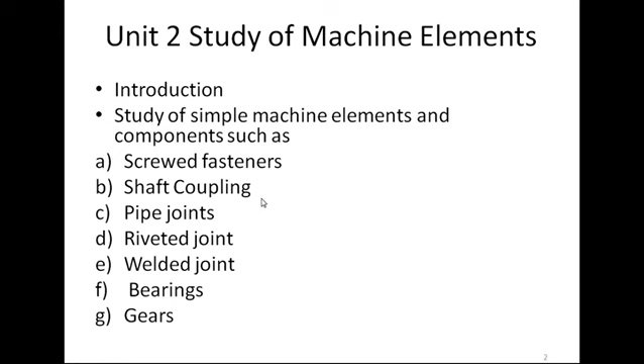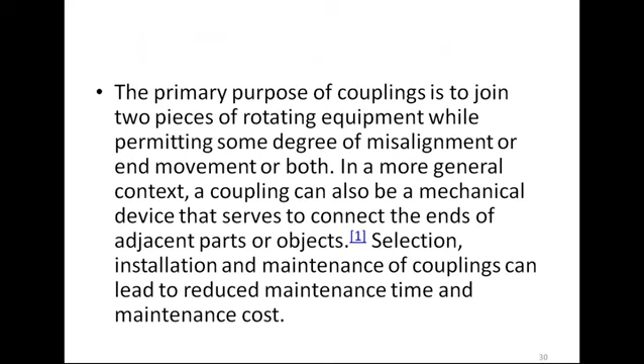In machine drawing, we have started the chapter Study of Machine Elements, and in this chapter we have seen the introduction. We have started the machine elements, we have seen screwed fasteners, we have seen the shaft coupling, and from today's lecture we are going to see the pipe joint. Okay friends, so today we are going to see the pipe joints.

So first of all, we want to see why pipe joints are required and what is meant by a pipe joint. A fitting or adapter is used in a pipe system to connect straight sections of pipe or tube, adapt to different sizes or shapes, and for other purposes such as regulating or measuring fluid flow. These fittings are used in plumbing to manipulate the conveyance of water, gas or liquid waste in domestic or commercial environments within a system of pipes or tubes.

So basically pipe joints are used when we want to transfer fluid or gas from one place to another place. We require to use tubes. Sometimes we are using material like steel or mild steel for transfer of liquids, or sometimes we are using plastic like PVC pipes for transfer of fluids. So basically pipe joints are important when we are using pipes from one place to another place.

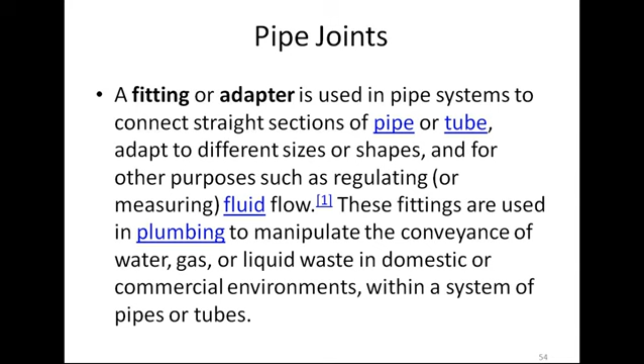So first of all we are going to learn what kind of material we are using for the pipe joint. We can use carbon and galvanized steel, impact tested carbon steel, low temperature carbon steel, and stainless steel. We can also use non-ferrous metals, including copper and Inconel.

We can also use non-metallics like acrylonitrile butadiene styrene, in short form ABS, or fiber reinforced plastic, that is FRP, or polyvinyl chloride, that is PVC, or high density polyethylene, that is HDPE. So these are the many types of materials available in industry.

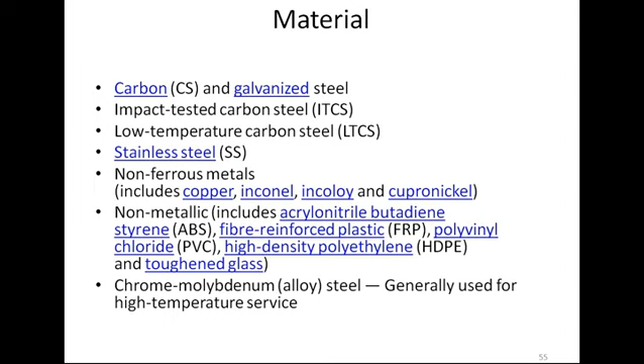As per the requirement, what kind of fluid or chemicals we are transferring, and what is the distance, how long a distance we want to transfer, and whether we require temporary pipes or permanent pipes, on the basis of this we are going to select one of the materials for the pipe joint.

So in pipe joints, the first element we are going to see is the elbow. An elbow is installed between two lengths of pipe or tubing to allow a change of direction, usually a 90 degree or 45 degree angle. The ends may be machined for butt welding, threaded or socketed. So you will see here the elbow looks like this, and here we have shown the general layout drawing of the elbow, with one diameter D1 and another diameter D2.

So when you want to connect two pipes which have a 90 degree angle between them, and whatever liquid comes from one end you want to transfer at 90 degrees, in between these two pipes we are going to attach this elbow. That's why here we have shown a 90 degree elbow.

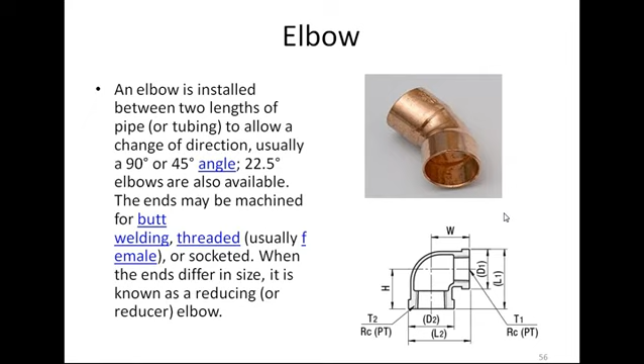So here we will see the actual application. This is one pipe and this is another pipe, and we want to transfer our liquid or water from this level to this higher level. So here we are using this elbow. We have placed one end of a pipe into one end of the elbow and the other pipe into the other end of the elbow. So we can use this elbow for proper transfer of fluid through 90 degrees.

Here one more example I have shown. This is one pipe, this is another pipe, and this is another pipe, and these three pipes are joined with elbows. In between these two pipes we have used one elbow, and in between these two pipes we have used one elbow. So like this we can connect two pipes that are at a 90 degree angle.

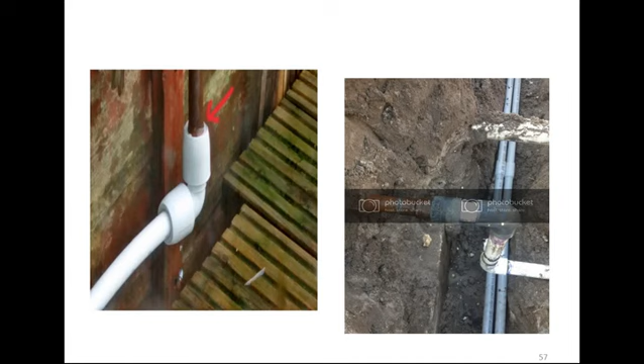The second most important pipe joint we are going to see is a coupling. A coupling connects two pipes. If their sizes differ, this fitting is known as the reducing coupling, reducer, or adapter.

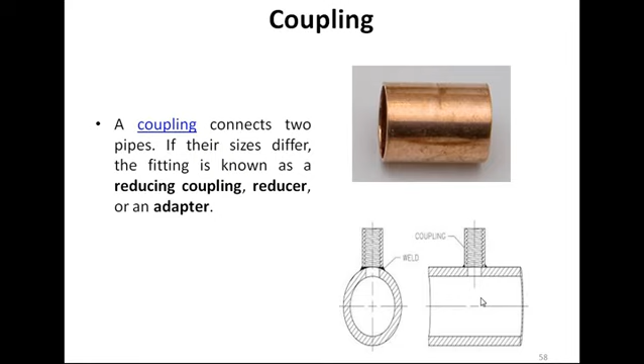This is one coupling, used when the pipes are in a straight line portion that we can connect. Here is a general layout drawing of a coupling. One pipe is inserted from this side and another pipe from this side, and here we do tightening using a bolt. By tightening this bolt, the pipes we have inserted remain close together.

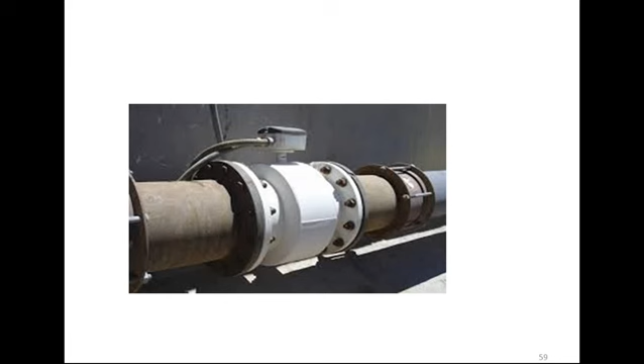Now next we are going to see a union. A union also connects two pipes. It allows future disconnection of the pipes for maintenance, and allows easy connection and disconnection multiple times if needed. It consists of three parts: a nut, a female end and a male end. When the female and male ends are joined, the nut seals the joint by pressing the two ends tightly together. Unions are a type of very compact flange connector.

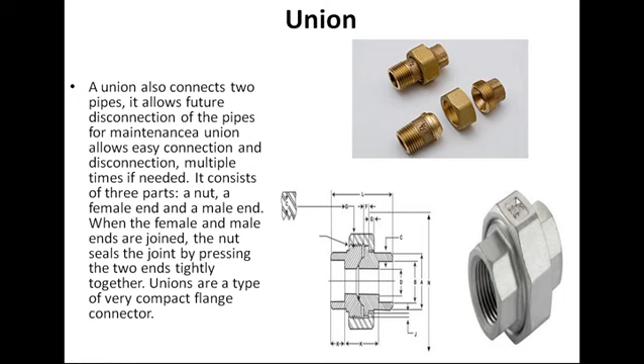This is one more example of a union, and this is the application for union. This is one pipe and this is another pipe, joined by this union.

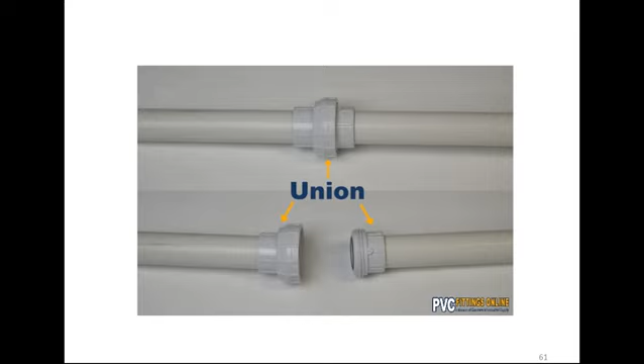So the main advantage of a union is, whenever we want to do maintenance in future, because sometimes there can be a problem inside the flow of fluid, we require to do maintenance of these pipes, and we don't need to cut them. Sometimes if the joints are rigid or permanent, it is very difficult to do maintenance, and we require to cut the pipes, then use one more joint to attach the two pipes again. But because of this union, we have provided a nut. Just by rotating the nut, you can disengage the two pipes again, do whatever maintenance you want, and once again be able to join the two pipes. This is the main advantage of this union.

Now the one more pipe joint is a reducer. A reducer reduces the pipe size from a larger to a smaller bore. Alternatively, reducer may refer to any fitting which causes changes in pipe diameter. One more advantage of a reducer is, if you want to join two pipes having different diameters, one pipe with a big diameter and another with a small diameter, it is very difficult to join them directly. In such cases, your problem is solved by a reducer.

At one end of the pipe having a big diameter, we attach the big diameter end of this reducer. And at the other end, where the small diameter pipe is there, we attach it with the other end of the reducer.

So two different diameter pipes can be attached with each other, and whatever fluid flow you want to do from one place to another place, that can be possible. So this is the main function of a reducer, and that's the purpose for which we use a reducer.

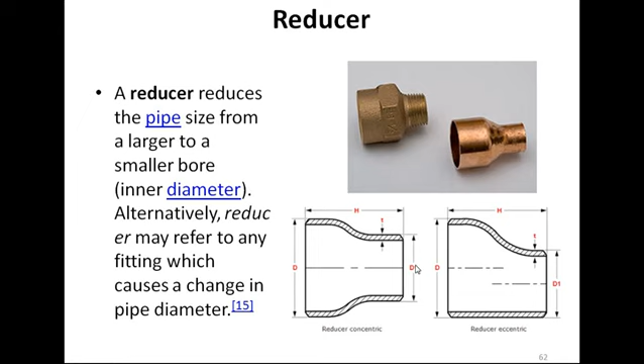And here one more type of reducer is the eccentric reducer. So here we have used the eccentric reducer.

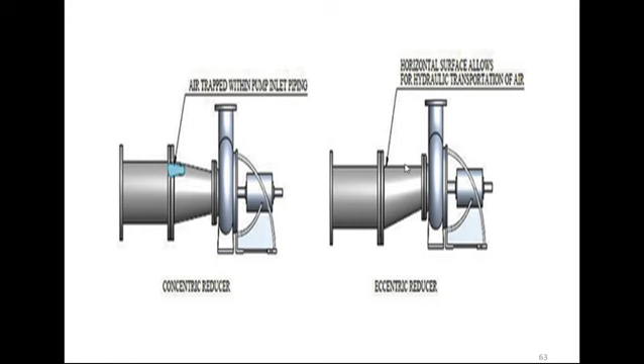Now one more thing we are going to see is a T. Maybe you have observed this T in so many places, and why we use this T is a very important thing. Sometimes we want to transfer our fluid flow into two different lines.

Suppose if we want to transfer fluid from one line to another two lines - if T is not present, then you would require two separate lines or two separate pipes to transfer from one to another.

So because of T, what will happen? Only by using T, from one fluid flow line of pipe, you can transmit the flow of fluid from one level to another level. You can transmit whatever pipes you want from one place to another place. So in general, that's what we can say about T.

A T, the most common pipe fitting, is used to combine or divide fluid flow. It is available with female thread sockets, solvent weld sockets, or opposed solvent weld sockets, and a female threaded side outlet. Tees can connect pipes of different diameter, or change the direction of a pipe run, or both.

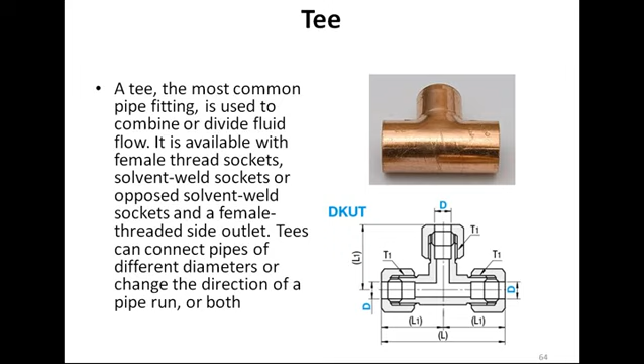So from one side the fluid enters and then the fluid goes to the left side and maybe the right side. So by using just one T, you can divert the fluid flow into two different directions. So this is the application we have seen.

Now one more thing we are going to learn is the cap. So what is the use of a cap? In general we can say a cap is usually a liquid or gas tight cover for the otherwise open end of a pipe.

A cap attaches to the exterior of a pipe and may have a solvent weld socket end or a female threaded interior. The exterior of an industrial cap may be round, square, rectangular, U or I shaped, or may have a hand grip. If a solvent weld cap is used to provide for a future connection point, several inches of pipe must be left before the cap.

When the cap is cut off for the future connection, enough pipe must remain to allow new fittings to be glued onto it.

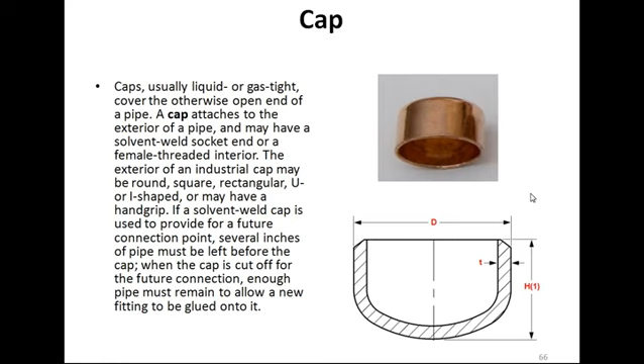This copper type of cap is shown here. It can be PVC also, any kind of material you can use as per the application requirement. This is a general layout drawing of a cap. Mostly thickness, height, and this diameter D will change according to which pipe you want to attach the cap. As per the number of varieties, caps are available in industry.

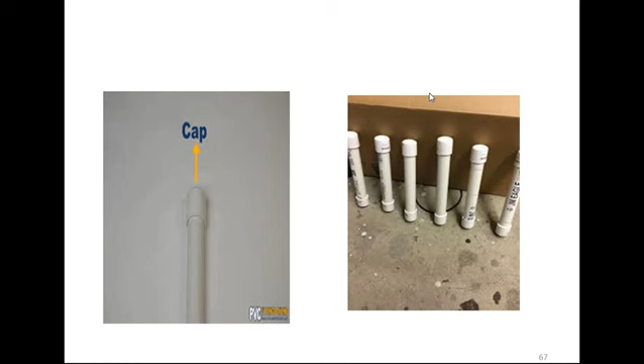Now the next one is a barb. What is the use of barbs? A barb or hose barb, which connects flexible hose or tubing to pipes, typically has a male threaded end which mates with female threads. The other end of the fitting has a single or multi-barb tube, a long tapered cone with ridges, which is inserted into a flexible hose.

An adjustable worm drive screw clamp or other type of clamp is often added to keep the hose from slipping off the barbed tube. So this barb is mostly used when you want to connect two hose pipes or two plastic pipes in a fluid connection, mostly in hydraulics. In hydraulics, or maybe in pneumatics also, you can use this one when you want to connect two pipes.

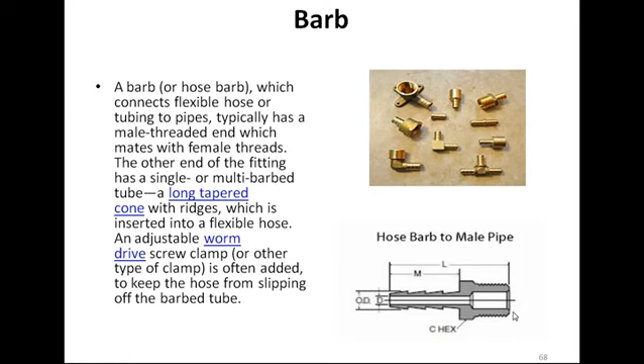One end is going to insert into one pipe, whatever the PVC pipe or maybe a soft pipe, and another end is going to insert into another pipe. So like this we are going to make a connection between two pipes. Here you will see the hose barb to male pipe. This is a general drawing of the hose barb, and here this end we are going to insert into one pipe, and the other end of the pipe is going to insert here.

Now we are going to see the next one, the threaded pipe joint. A threaded pipe has a screw thread at one or both ends for assembly. Steel pipe is often joined with a threaded connection. Sealant is applied in the form of thread sealing compound or thread seal tape, also known as PTFE or Teflon tape, and the pipe is threaded into a threaded fitting with a pipe wrench. Threaded steel pipe is widely used in buildings to convey natural gas or propane fuel and is a popular choice in fire sprinkler systems due to its resistance to mechanical damage and high heat.

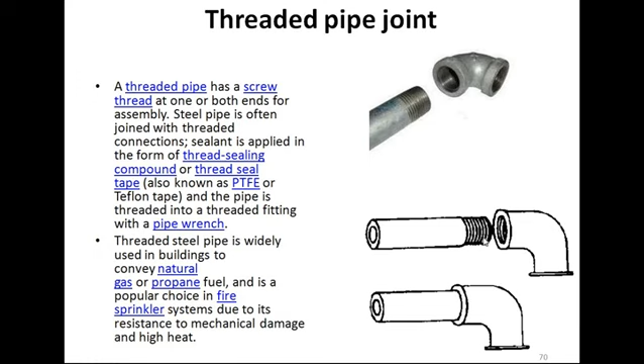Here when you want to connect two joints, we are using threaded pipe joints. This joint has threads. By using these threaded joints you can connect two pipes from this side and this side. Here also we have provided threads on the pipe so that it can be connected permanently.

Next you will see we are going to add sealant on the threads, and then we are going to insert into another pipe. Because of these threads and this sealant, it will become a permanent bond. So whatever leakage, if there is water flow inside or chemical flowing inside, there will not be any leakage because of this sealant.